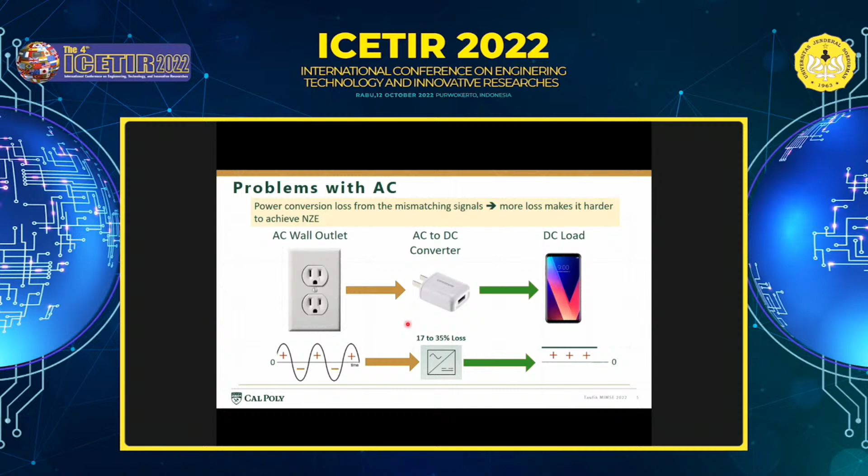And unfortunately, in the process of converting from AC to DC, you're going to have some kind of a loss. And the loss is not small. It's actually pretty significant. It's 17 to 35% loss. So that's a big loss if we are keeping up with AC to DC.

And there are other problems with AC. AC is harder to control than DC. The reason being, for example, there is only one type of power in DC. So when we're dealing with DC, there's only one single power consumption you have to deal with. That would be watts, right?

Whereas in AC, we are dealing with more than just one. We have watts, and in addition to that, we also have instantaneous power, average power, reactive power, complex power, as well as apparent power. So there's more that we need to worry about when we are using AC, right? Compared to DC, there's only one that we need to worry about versus 4 or 5.

In addition to that, AC usually requires more types of compensation, unlike DC. For example, reactive compensation, right? And this could be a problem if you have an inductive load, then you're supplying the same wattage at higher current.

That higher current translates into higher losses, right? And so on and so forth. So yeah, bottom line is that AC by itself inherently is harder to deal with than DC.

Okay, so hopefully I've convinced you enough to conclude that we somehow need to complement AC with DC, right? And there are reasons for doing this. Number one would be the increasing number of residential DC loads.

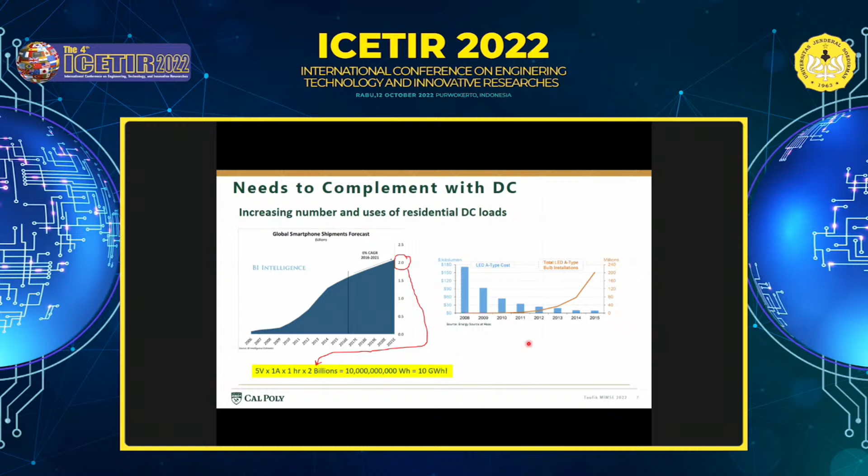And that's not a tiny number anymore, right? Again, these are all processed through DC. And then we have this upcoming technology that's become prevalent these days, called USB Type-C. Now we're all familiar with USB Type-C compared to a couple of years ago. Not many people knew about it, but now it's becoming common.

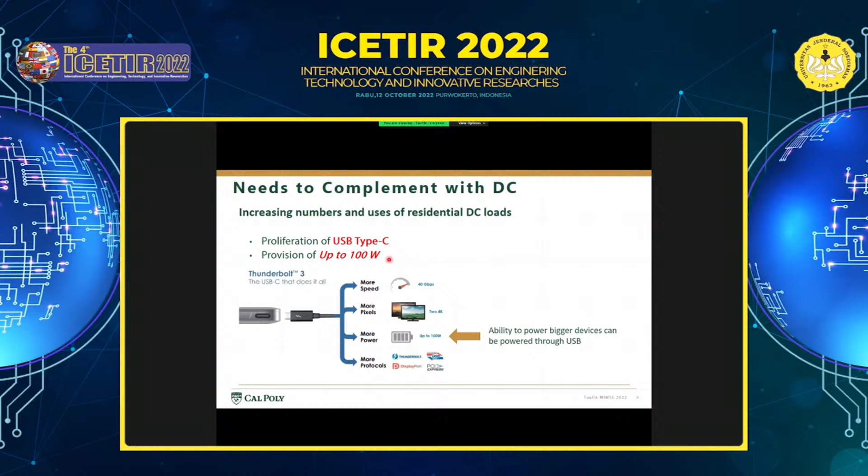What's great about USB Type-C is that the targeted wattage that can be delivered with this connector is 100 watts. That's great news, because 100 watts could power many things, including your laptop and your TV, if they're running off DC, as well as many other device chargers. So you can see from just looking at these numbers that the future of DC is something we need to watch out for.

And then another thing would be—I've done this. Okay, somebody's turning on their microphone. So I've done these studies on residential electricities.

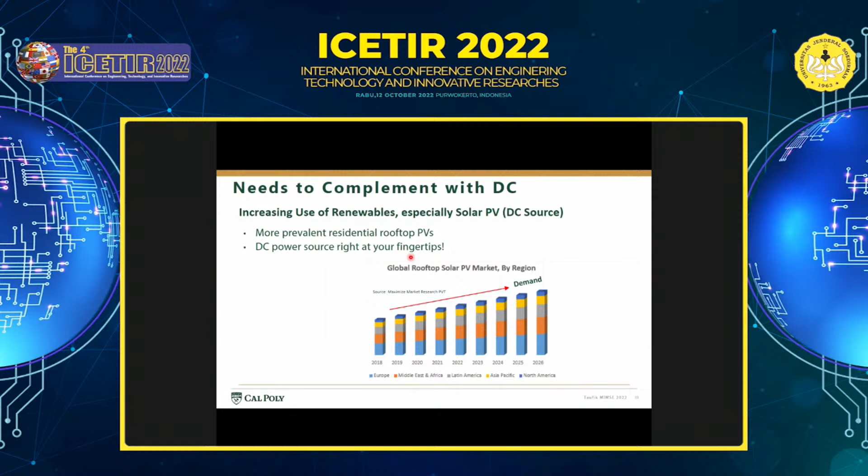And then we have this increasing use of solar panels, rooftop solar panels, and this is actually an energy source that provides DC. So now you have a DC power source right at your fingertip. And that's something that again would hopefully indicate the increasing importance of DC.

These days we have solar panels, and from the solar panel, which is DC, we convert it to AC, and then we convert it again to DC. Then we use DC to DC to finally power our DC loads. Rather than having three different stages, we can bypass and just use one single stage conversion, which would make it more efficient. And if it's more efficient, there will be less loss, making it easier for us to achieve this net zero energy house in the future.

I talked about smart devices, and all of these devices, as you experience as well, including in Indonesia, more and more people are putting cameras, alarm systems, smart garage openers, things like that. And these are all running in DC. So there's a big market there that would be relying on DC.

And not to forget, we also have energy storage. More and more people, especially in the US, have been putting energy storage in their house, improving reliability. If the power is out, or if there's more power produced by the solar panel, the energy can be stored in the batteries. And as you know, energy storage or batteries will be running or operating in DC.

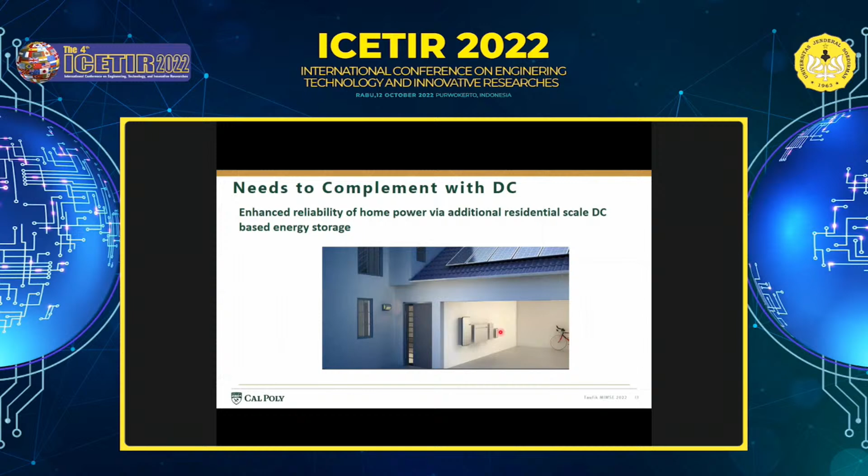So what will be the solution? Initially, as I said earlier, I've done some presentation for University of Jenderal Sudirman a long time ago on DC. But now this project evolves into AC/DC. The reason being the DC house by itself is perfect for off the grid, whereas AC/DC will be more suitable for urban areas, for cities, for houses in big cities.

Basically urban house. Now, hybrid AC/DC house operates on crisscrossing AC and DC electrical systems. It has a dedicated AC line for AC loads, dedicated DC line for DC loads, and is able to support either load type when their corresponding source is down. And the battery is going to be optional, and additional sources can also be connected.

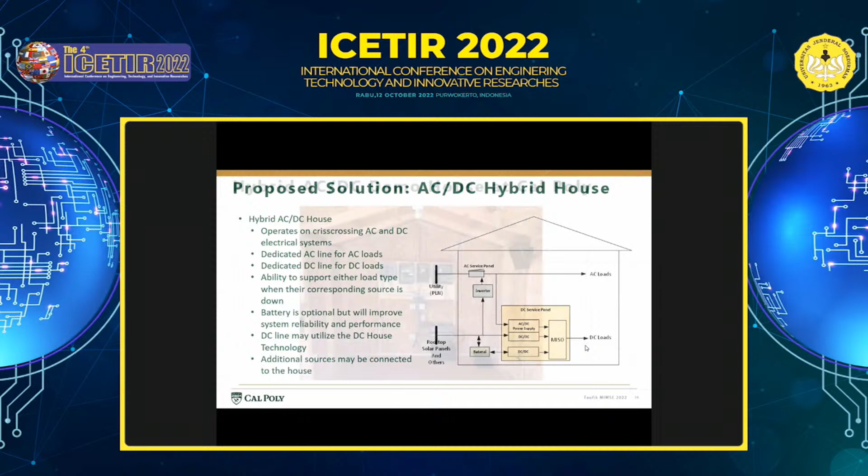Challenges on the hybrid AC/DC house. There's always challenges, right? Anytime we are exploring some new direction of some technology, there's always challenges. But challenges, as you know, present opportunities and beyond, including innovations. So this is actually a golden opportunity for us to be able to be the leader on this technology. We want to move fast, so we want to be able to explore more and lead more.

The challenges that we have, there are many. I won't go through this in detail, but we have limited DC sources, for example. So far we're using solar panels, but I'm sure it's not the only way, it's not the only type. And then how can you make those renewable energy sources adoptable? That's a question that's really tricky to answer. And then the MISO converter needs further improvement. The DC bus and loads are not standardized, and this is more difficult to protect from faults. There's some strict regulations due to ability to backfeed power, as well as the EMS system that would be great to develop.

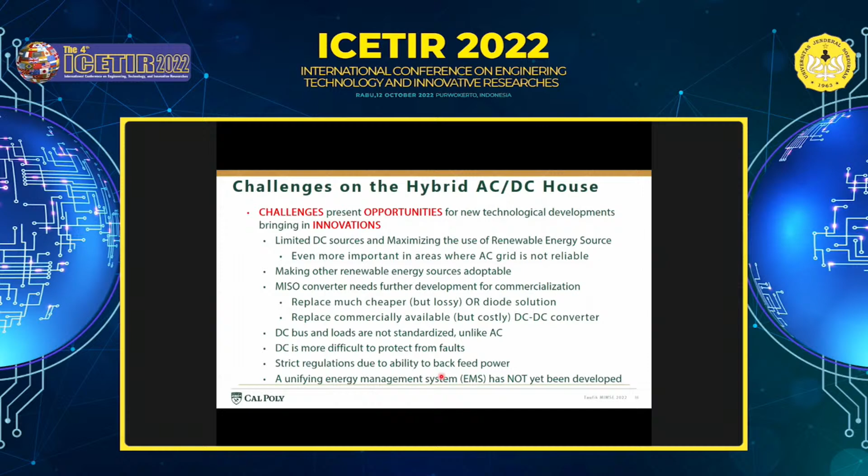So I'll go a little bit more into detail on each. Here's the first one, adaptability. Here in the US, we have this term or jargon called NIMBY. NIMBY stands for not in my backyard. Imagine if you have a house here, let's say this is our future house. I don't know about you, but I don't want to have a big, huge, humongous wind turbine behind our house.

That would be ugly as well as noisy, right? So that would be a challenge of hybrid AC/DC house: how can you make these renewable energy sources more pleasing to see as well as more adaptable to our house? So I give you two examples.

These are already existing technologies. I don't know if they're commercially available yet, but this is just an example where some of you who are interested in doing this could find a direction to improve the existing technologies.

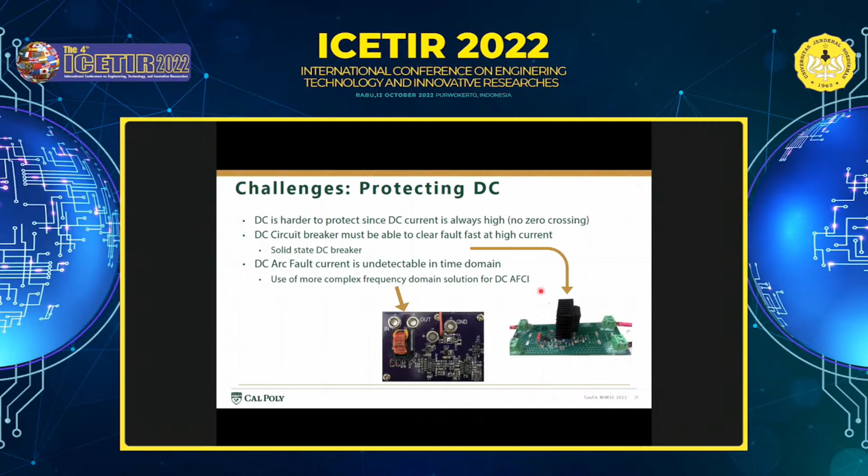Other opportunities involve developing more DC loads. That's actually becoming a hot trend in the US, where people are now designing more and more DC loads, such as DC water pumps, DC water filtration systems, freezers, air conditioning, and so on. So there's a lot of DC loads that can go into a house.

So if you are interested in doing something like this with me, let me know, I'll be more than happy to help in any way I can. It's a big undertaking, and that's why I'm really appreciative of the opportunity to share, because this is not a one-person project. It takes a village to actually support this project. So the more people get involved, the merrier, and the more collaboration between different universities, including myself, the better.

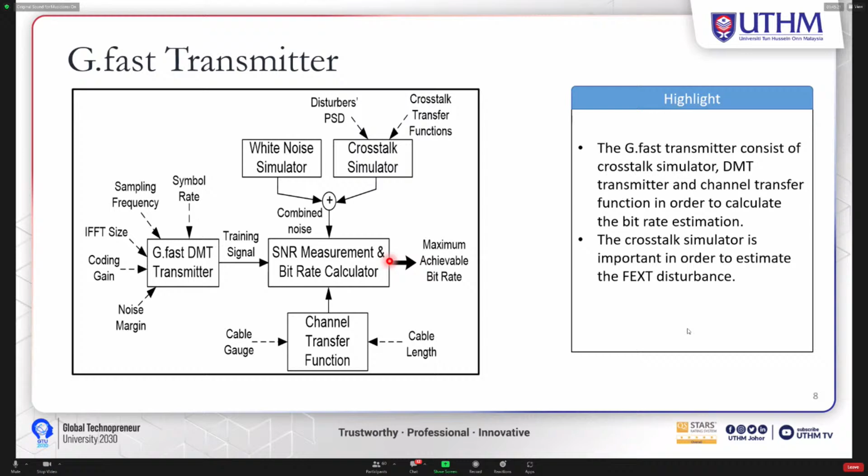The figure shows the block diagram of the G.fast bitrate transmitter, which consists of a crosstalk simulator, discrete multi-tone transmitter, and also channel transfer function as the input to the bitrate estimator. The crosstalk simulator is very important in order to estimate the far end crosstalk disturbance in the subscriber line.

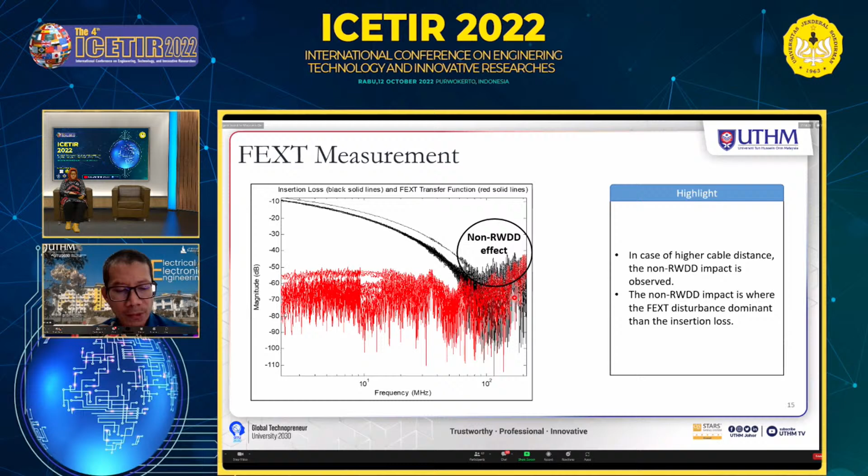These are another example of non-row-wise diagonal dominance plots, as you can see. This is for a 100-meter cable. As you can see, the top element of the matrix has a higher magnitude compared to the other elements of the matrix.

So in telecom, we use pre-coding as a technique to mitigate or suppress the crosstalk interference at the transmitter and also at the receiver. Since signals are transmitted from the same location, pre-coding can be applied to pre-distort so that the crosstalk signals arriving at the customer premises equipment are mitigated.

In G.fast systems, pre-coding is a compulsory requirement based on the standard ITU-T G.9700, which is based on the power spectral density, and G.9701 on the physical layer.

Pre-coding has two types: linear pre-coding and non-linear pre-coding. Examples of linear precoders are the zero forcing precoder, diagonalizing precoder, and equal power precoder. There are others like maximum ratio combining or transmission, beamforming precoder, and transmit Wiener precoder. Non-linear precoder examples are the Tomlinson-Harashima precoder, the Costa precoder, and vector perturbation precoder. Linear precoder is used for the row-wise diagonal dominant case, while non-linear precoder is used for the non-row-wise diagonal dominant case, or non-RWDD case.

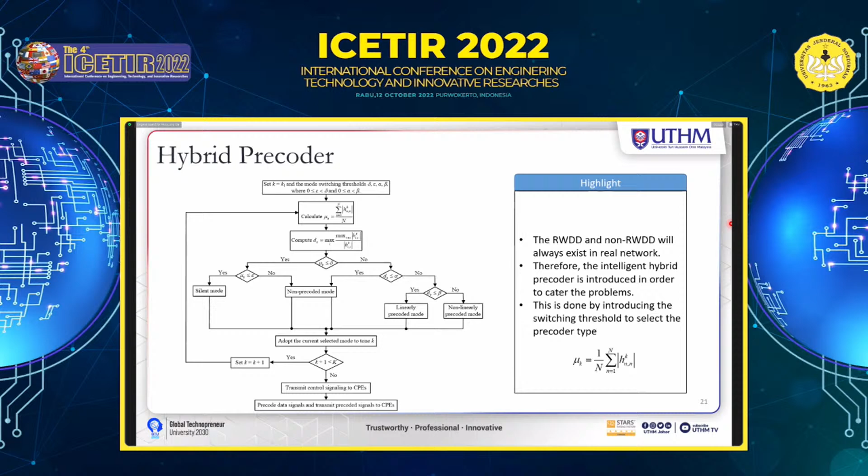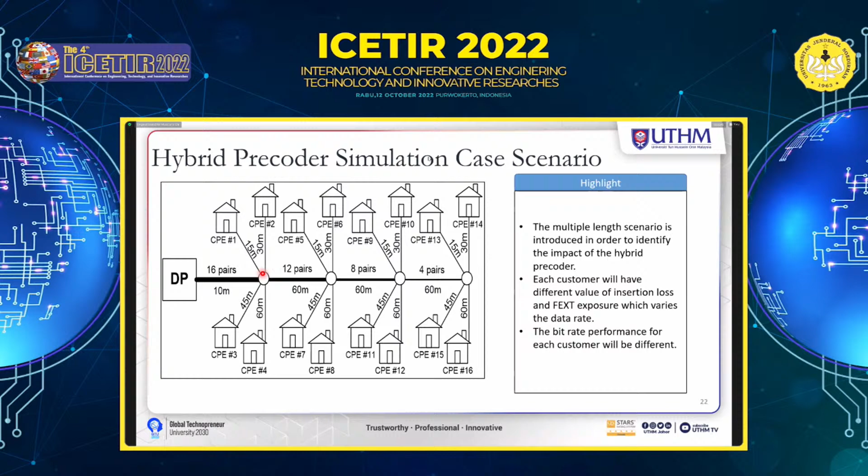In this loop configuration, the shortest distance to the customer premises equipment is 25 meters - 10 meters plus 15 meters, for example. So the shortest customer premises equipment to distribution point distance is 25 meters, and the longest distance, if you calculate carefully, is 250 meters to customer number 16. The loop lengths of all CPEs are shown in the figure, and each customer will have different values of insertion loss and far-end crosstalk.

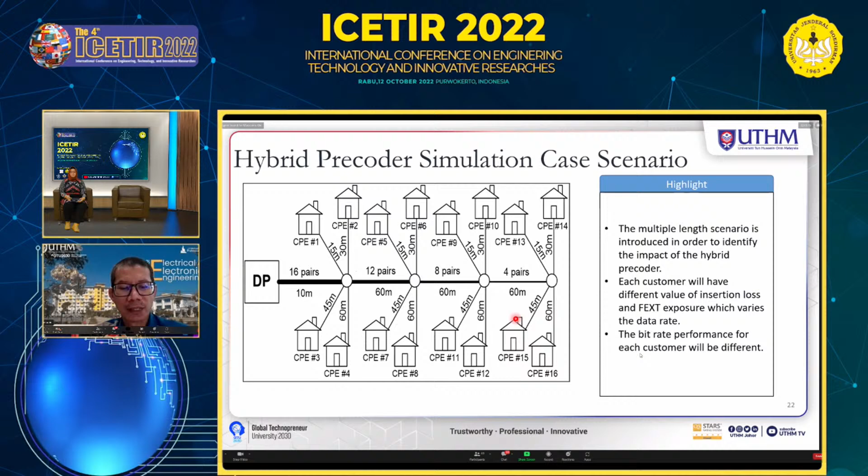In summary, far-end crosstalk noise can lead to significant degradation in achievable G-fast bit rates. So to ensure successful deployment of G-fast technology, it is essential for far-end crosstalk to be reduced or removed by using precoding, and there are several types of precoding that can be employed in the G-fast transmitter. Lastly, this work paves the way for the development of crosstalk modeling and mitigation techniques for crosstalk cancellation in future G-fast systems. That's all for my presentation.

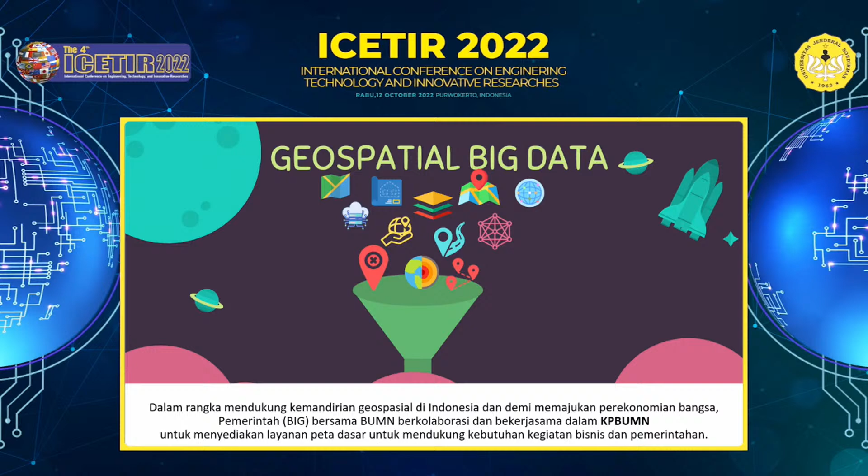So we are dealing with this large-scale image, large-scale mapping in cooperation with BUMN using what we call KPBUMN, kerjasama pemerintah badan usaha milik negara, under the Keppres 11/2021. So this is some of the regulation. I can just skip this one.

Several methods that we use for our technology for acquisition of the geospatial information data. We can divide it into 3 categories. First, in the urban area, we need more detailed data with a very high level of quality, using the airborne as well as the LiDAR, and also using aerial photographs, both metric or non-metric. And then in the rural area, it might be less detailed compared to the urban area.

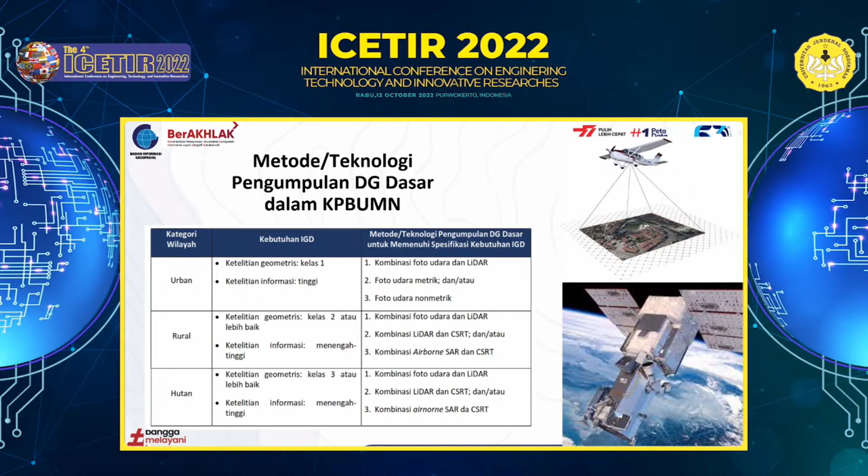We use the combination of citra satelit resolusi tinggi, or what we call the large scale satellite images, in combination with the airborne SAR. And in the forest area, for example, we can do the combination of aerial photo and LiDAR, and so on. So this is part of the technology behind the data acquisition, how we do the LiDAR and the photogrammetry, as well as how we work with the large scale remote sensing image. And this is how we do the airborne SAR processes.

This is considered a very convenient technology for the acquisition of the data, meaning that we can do the acquisition during the day as well as in the night, because it can go through the fog, bad weather conditions as well as the cloud, and so on, and we can cover a large area compared to the other technologies. So nowadays we are pushing to develop this technology, especially for our industry and also for us in the BIG.

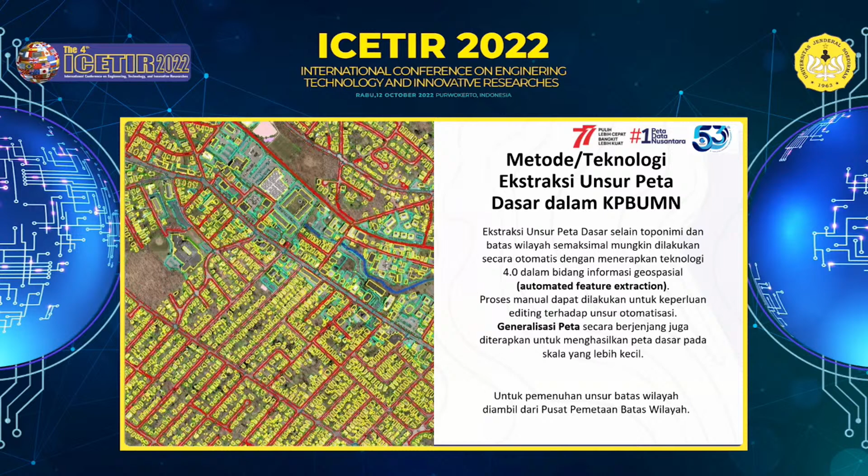Then we do the extraction and the analysis using, for example, what we call automated feature extraction, or we can also use artificial intelligence to help us with the digitizing and with identifying the objects when we get the data from space. And later on, we put the name on every polygon, what we call the toponymy processes.

Another important aspect is participatory mapping, where the community can also be involved and contribute to developing our map. For example, developing the border map at the village level, the region level, the city level, as well as the national level, and so on. So this is an example of our base map services.

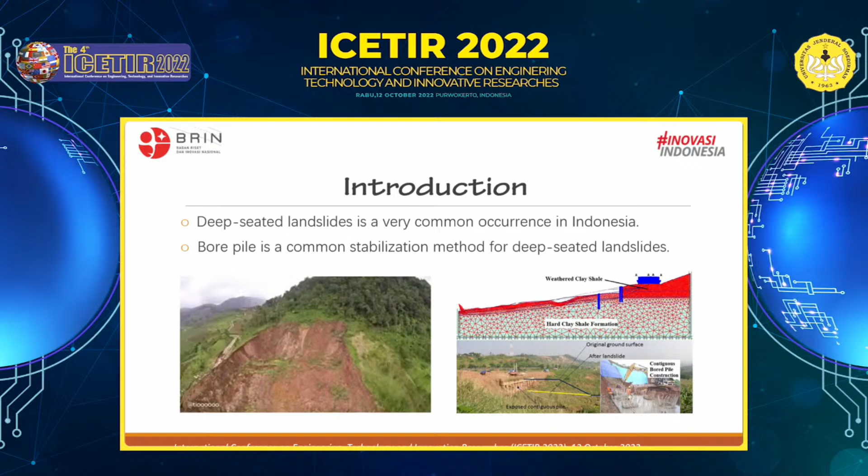the groundwater itself is still rising during rainfall, so the stability is still affected by the groundwater. As we understand, the influence of rainfall infiltration will increase the groundwater level, and hence the water pressure within the slope, and the increase of water pressure will decrease the shear strength and then the stability of the hill slope. So we can see that if we can control the groundwater level during the rainfall event, then we can maintain the stability of the hill slope.

Many studies have already indicated that when we draw down the groundwater level, we can stabilize the landslide. Some methods already used to stabilize the landslide using this groundwater drawdown include the sub-horizontal drain, relief well, and the new method, siphon drain.

This is what we call the gravity-driven groundwater extraction for slope stabilization, the siphon drain. Of these three methods, the sub-horizontal drain is effective, but it has some limitations in that it cannot reach the deeper aquifer. The relief well is also effective, but has some limitations: the construction cost is very expensive. And the siphon drain, I will show you the effectiveness of this method in the next slide.

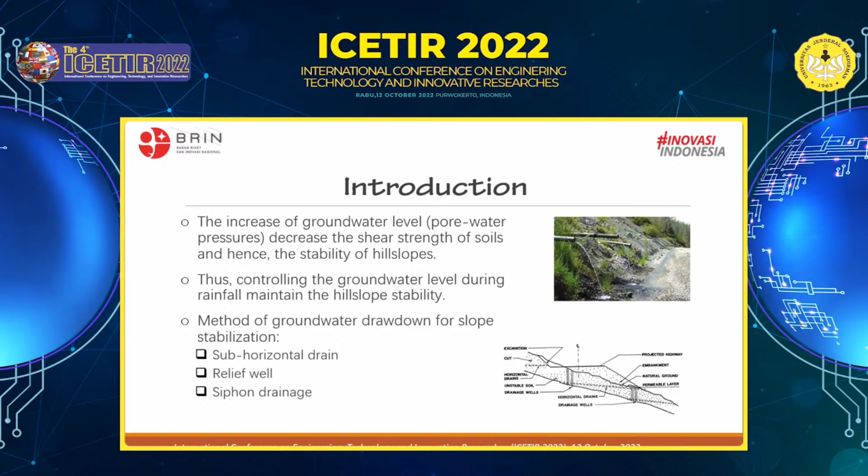The principle of the siphon drain is actually very easy to understand. You may already have done this kind of technique to extract gasoline from your bicycle or motorcycle tank into, let's say, a bucket. You put the tube into the tank, and then you try to suck the tube, and then suddenly the gasoline will flow into the bucket. This is the principle, a very easy principle of the siphon drain. As long as we have a different pressure within the system, the liquid will start to flow from high pressure to low pressure. And this principle is now applied to work for slope stabilization.

What we do with the siphon drain is how we can draw down the groundwater level continuously during the rainfall infiltration, during the rainfall event. We need to construct a vertical well, and then we insert a siphoning tube, very specially made, because it should withstand the weather. And then at the end of the siphon tube,

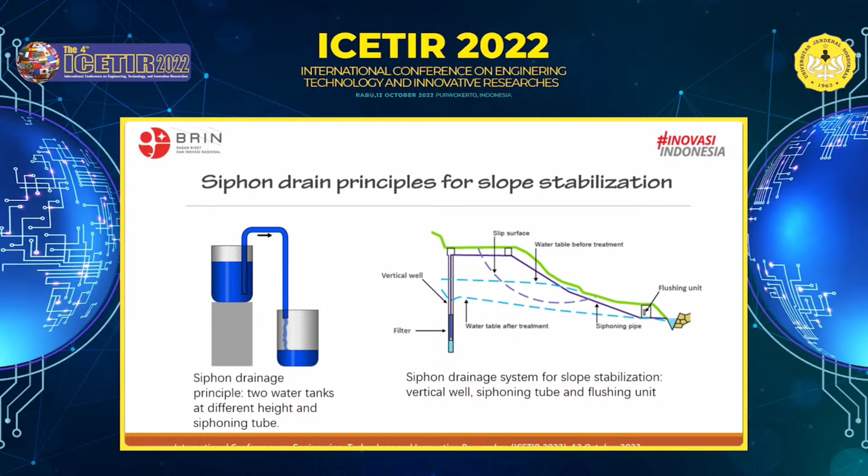The system is already applied in Europe, but we know that in Indonesia, when we consider the geological condition, there are some hill slopes that may have a bad quality of groundwater, especially in the volcanic area where sedimentation easily develops due to the influence of the weather.

So in order to evaluate the effectiveness of this siphon drain system, when we need to apply it to this geological condition, we have to understand the factors controlling the effectiveness of this siphon drain, and when we apply it to the field condition, what factors influence its performance in the field.

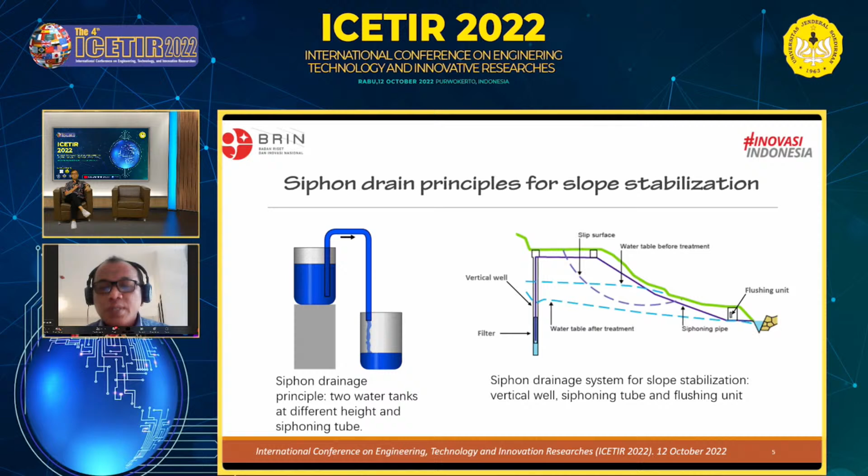So a few years ago, we conducted an experiment in the laboratory to clarify the factors controlling the effectiveness of the siphon drain method to lower a water table in a model slope.

The objective is to study the effect of the drainage well location, the initial water level, and different rates of water table rise on the performance of siphon drains. Of course, these three factors are very important to decide where we have to install, and at what distance, the vertical wells should be constructed.

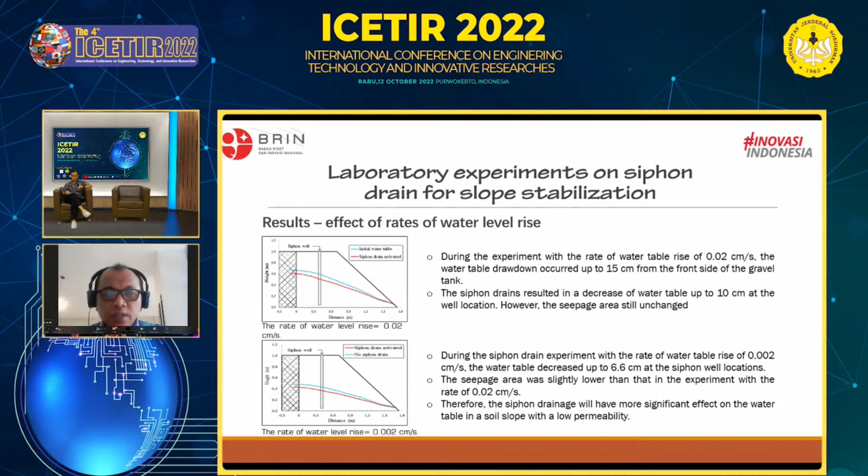During the siphon drain experiment with a rate of water table rise of 0.002 centimeter per second, the water table decreased up to 6.6 centimeters at the siphon well location. The seepage area was slightly lower than in the experiment with the rate of 0.02 centimeter per second.

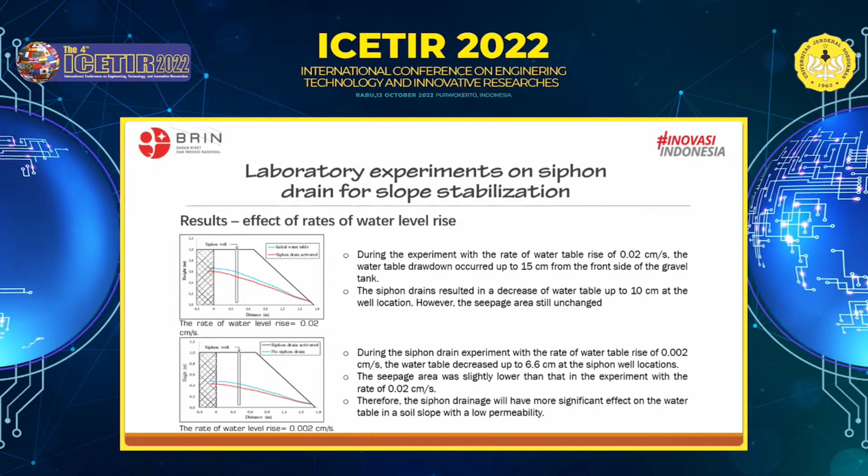So the siphon drain will have a more significant effect on the water table in a soil slope with low permeability. The conclusion of this laboratory experiment: the experimental results show that the siphon drain method's effectiveness depends on the initial water table, well location, and the rate of water level rise.

Second, the siphon drain method can significantly affect the slope when installed where there is high water pressure head. A significant drawdown of water table occurs at an initially high water table, and a significant drawdown of water table occurs at a slow rate of increase in the groundwater table, in other words, in a soil slope with low permeability.

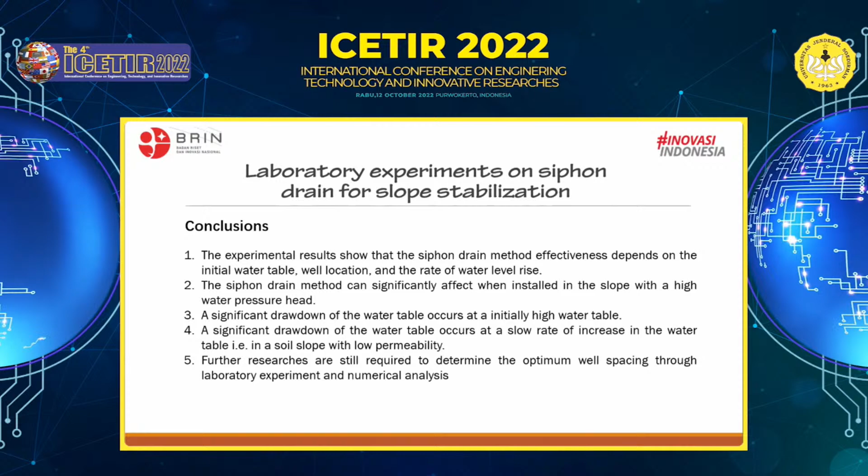Next, I will show you the field experiment of siphon drain for slope stabilization. The purpose and objective of this field experiment is to evaluate the effectiveness of the siphon drain system with vertical wells to maintain the stability of landslide masses in a volcanic hill slope in West Java.

The objective was to evaluate the long-term performance of the siphon drain method for lowering the groundwater in the landslide area, quantitatively evaluate the influence of the siphon drain system on landslide stability, and give some insight into the factors affecting the effectiveness of the siphon drain method in stabilizing landslide masses in volcanic soil.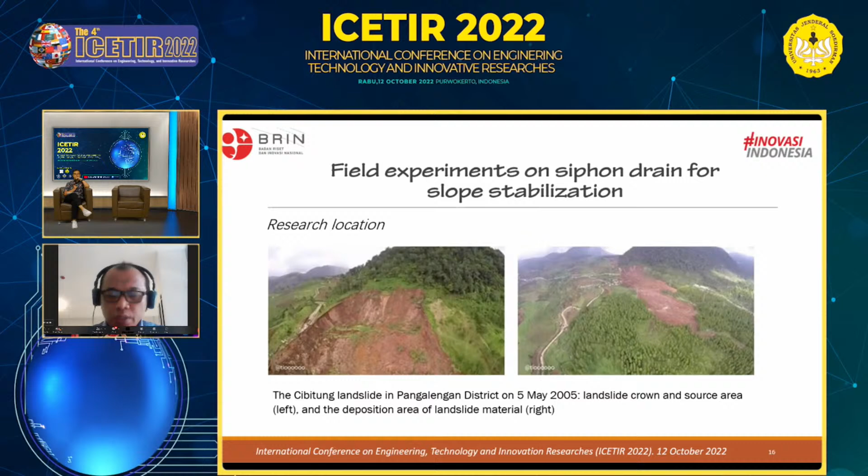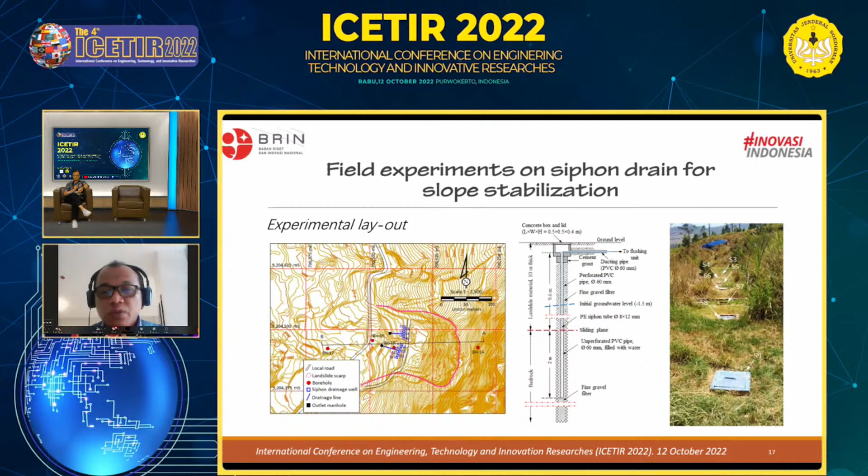This is the construction of the vertical well. We drill the well up to 12 meters, then insert the siphoning tube up to 10 meters depth from the ground level, and at the end, the siphoning tube is connected to the flushing unit.

This is the schematic cross-section of the slope in the landslide area, showing the location of the siphon well. The picture on the right is the flushing unit installed at the toe of the slope. In total, there are 10 flushing units installed there.

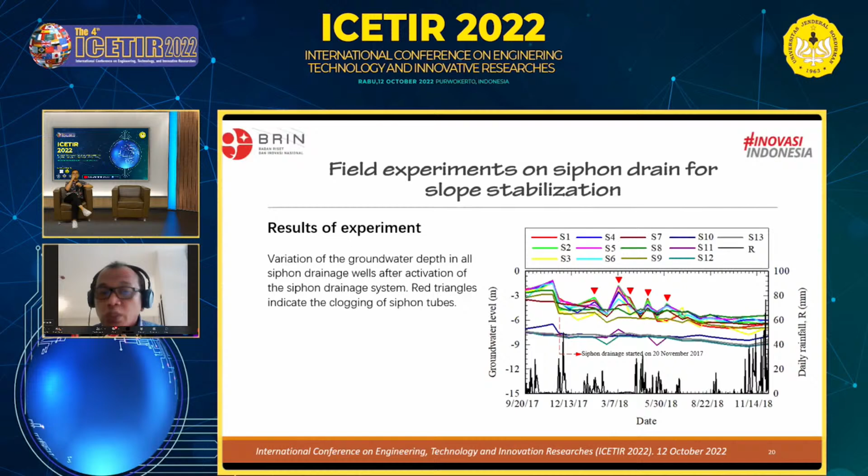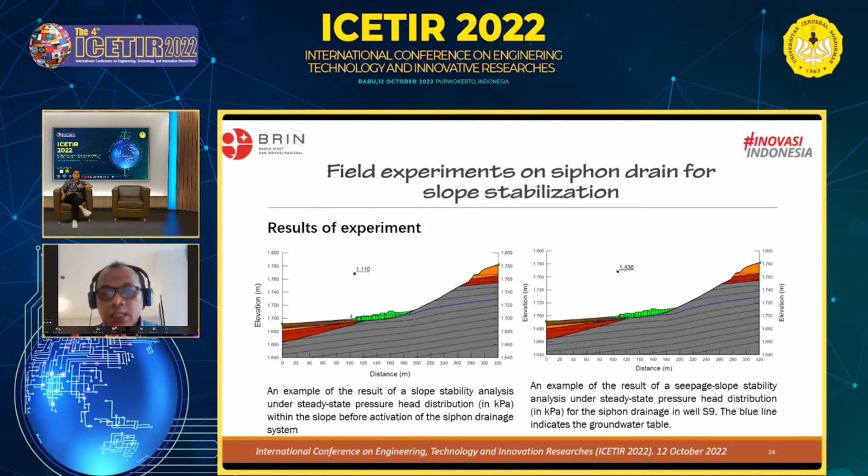So as a conclusion from the field experiment, in most landslide areas with a high groundwater level, the siphon drainage system can significantly reduce the groundwater level up to a depth of -7 meters

with a significant total discharge rate of up to 24 cubic meters per day. However, the siphon drain performance was affected by groundwater quality. So regular maintenance of the siphon tubing is necessary to maintain the long-term performance of the siphon drainage system in landslide areas with low groundwater quality.

Based on the series of numerical modeling, the implemented siphon drainage system effectively increased the stability of the landslide area. The safety factor increased from 1.1 to 1.4.

And monitoring the effect of the siphon drain system on the groundwater table in the observation well suggests that the siphon drainage performance is affected by the geological complexity of the study area.

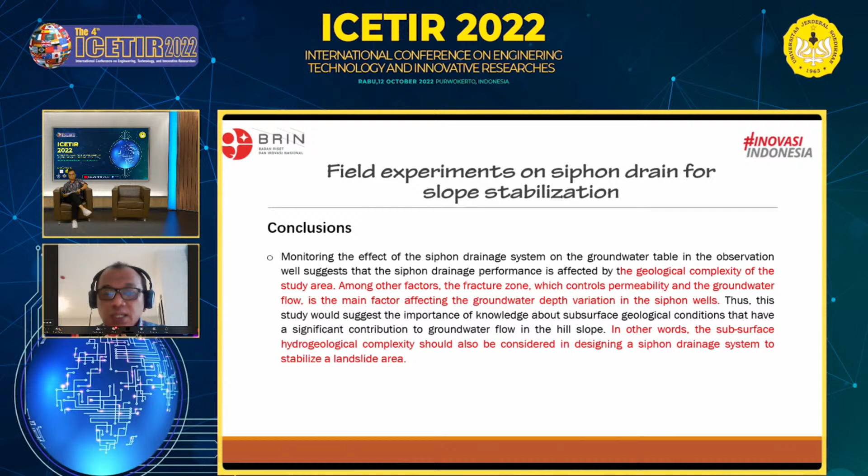Among other factors, the fracture zone, which controls permeability and groundwater flow, is the main factor affecting groundwater depth variation in the siphon well. So the subsurface hydrogeological complexity should be considered when designing a siphon drainage system to stabilize landslides.

Well, I come to the end of my presentation. Thank you very much for your attention.

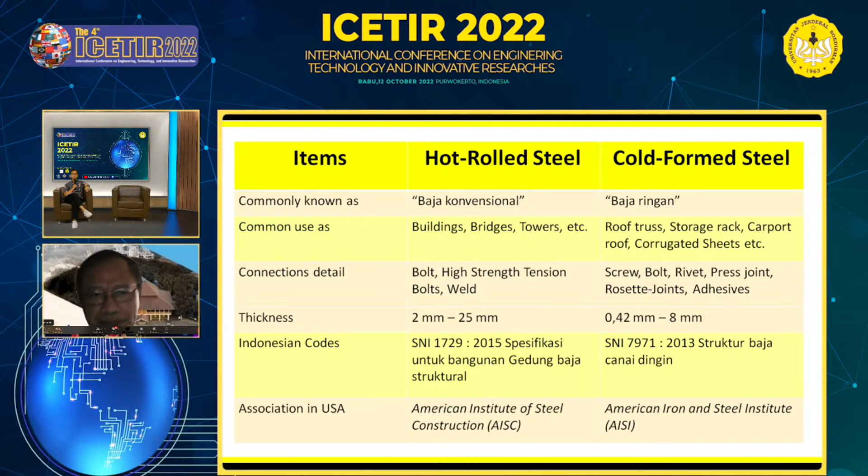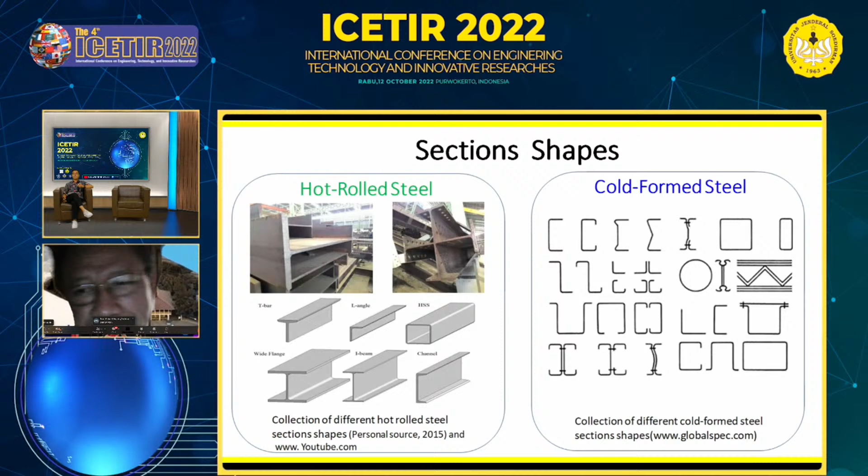And the application of hot rolled steel in the world has been coming for already 300 years, after the iron age. So I will not explain about this structure, as you have seen many of them already in Indonesia and other parts of the world.

And the application of cold form in Indonesia is focused mainly on the roof truss. Some engineers have tried to establish, for example, a short span truss bridge. And in Japan, for example, they already use many kinds of cold form steel applications, for example, for house framing.

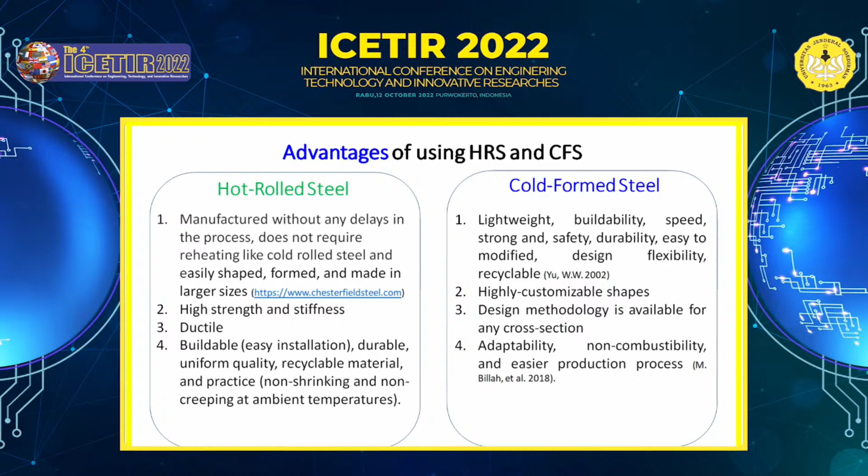On the other hand, for cold form steel, it is lightweight. This is easy to construct, and we can choose appropriate shapes that we want to use, and the design methodology is available for any cross section. So these are the advantages of both kinds of steels.

So the similarity in disadvantages is: first, about the residual stress. The two kinds of steels have residual stress after manufacturing. And the two kinds of steels are low in resistance to fire and also corrosion. So this is the same disadvantage between the two kinds of steel.

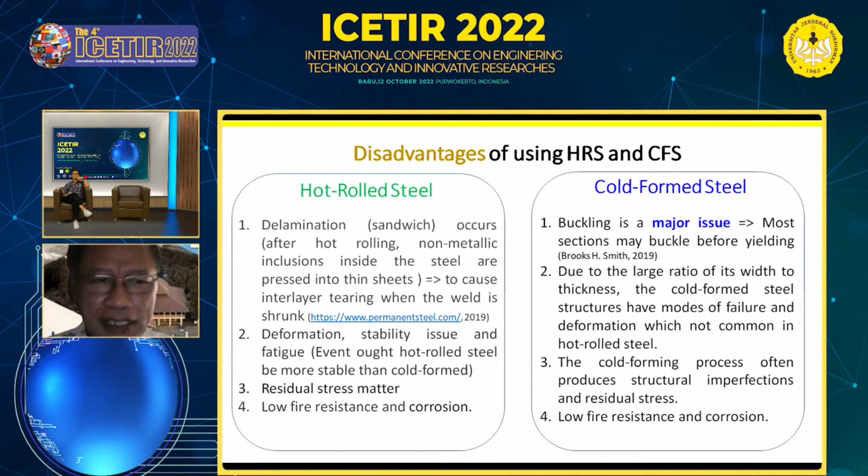So we come to the topic of manufacturing process. The hot rolling process should be done with pressure, and it is also done for cold rolling.

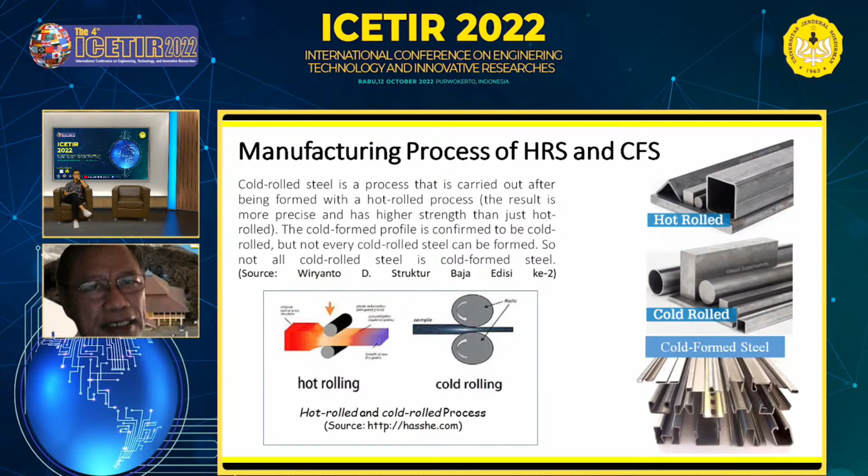The main differences between hot and cold rolling: cold form steel allows partial buckling of the section, so that the bearing capacity of the bar after buckling can be fully utilized, while hot roll steel does not allow local buckling of the section. The causes of residual stresses in hot roll and cold roll steels are different, so the distribution on the cross section is also different. The residual stress distribution on the section of the cold form, which is thin, is a curve type, but for the hot roll it is a film type.

So this shows again the process of manufacturing hot roll steels. The hot roll steel members are manufactured by roll press at very high temperatures, over 1,700 Fahrenheit.

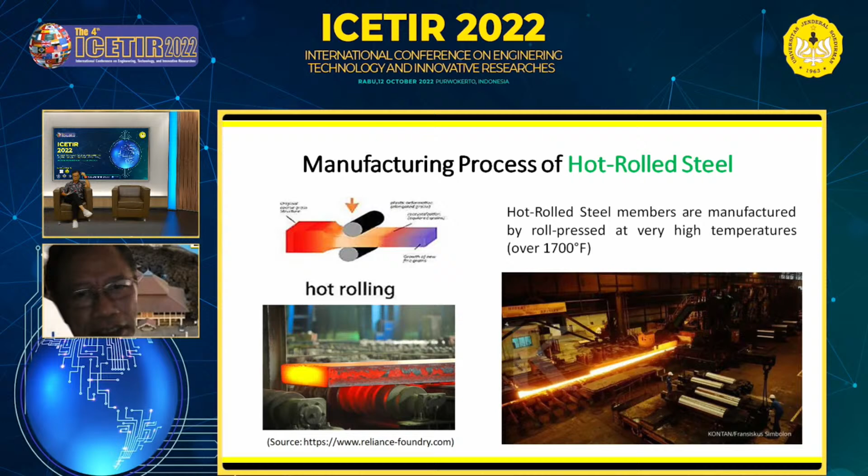And for the manufacturing process of cold form steels, we have three kinds of process. The first is what we call brake pressing. The second process is by roll forming. And the third process is by folding the plate of cold form steel.

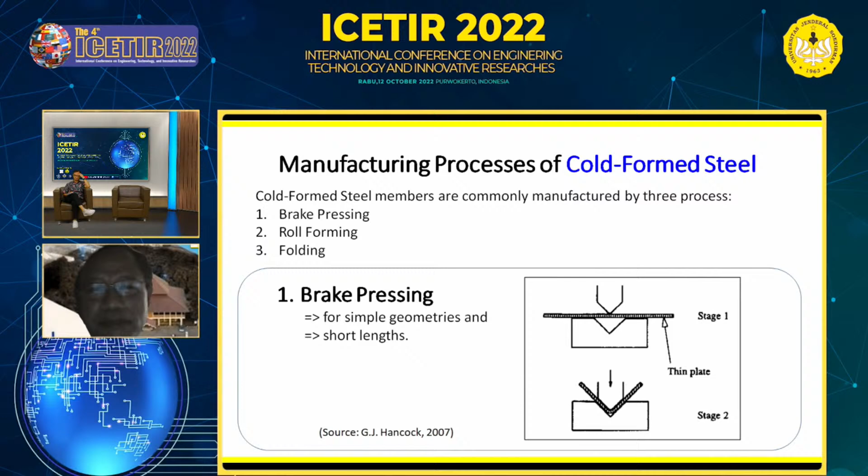So we can see that brake pressing is done for simple geometry and for short lengths of the profile. And roll forming is done for complex sections and long members. Commonly these members are used for roof trusses, floors, house framing, and corrugated sheets.

So the machines used for this roll forming are controlled with punching, cutting, dimpling, and printing capabilities, at general speeds of 20 to 40 meters per minute.

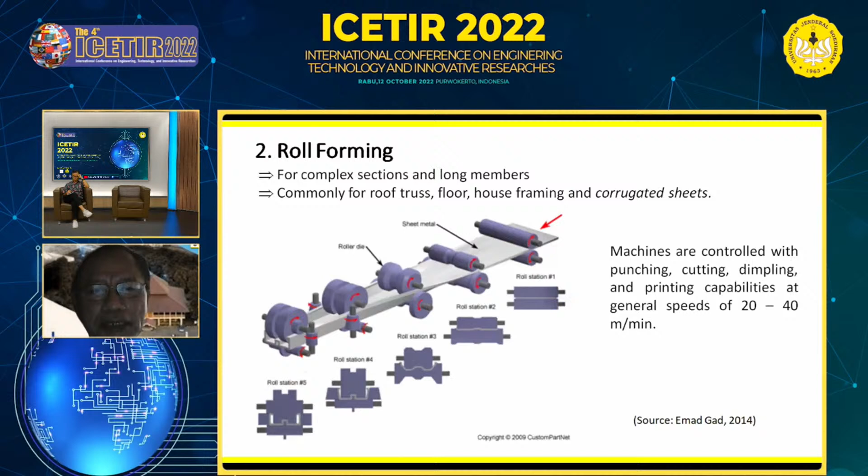And the third process is to fold the plate of the cold form steels. Each step has an effect to form one part of the profile. So for example, if we want to have a channel profile, it is done in a minimum of 4 steps, as you can see on the slide.

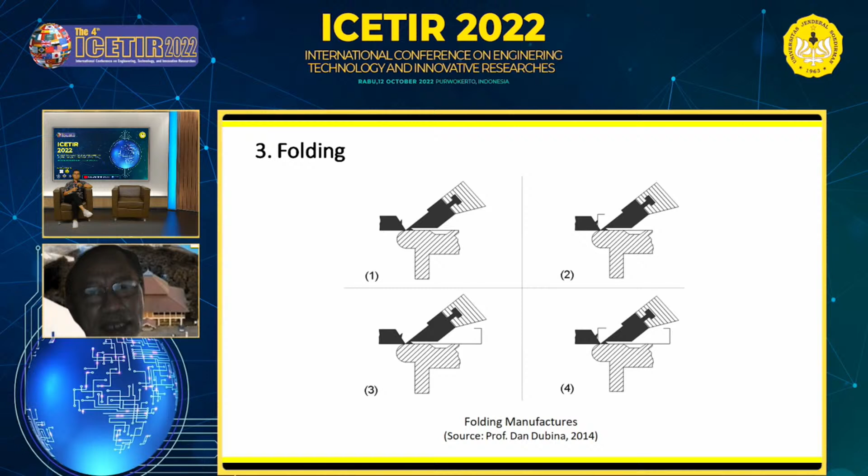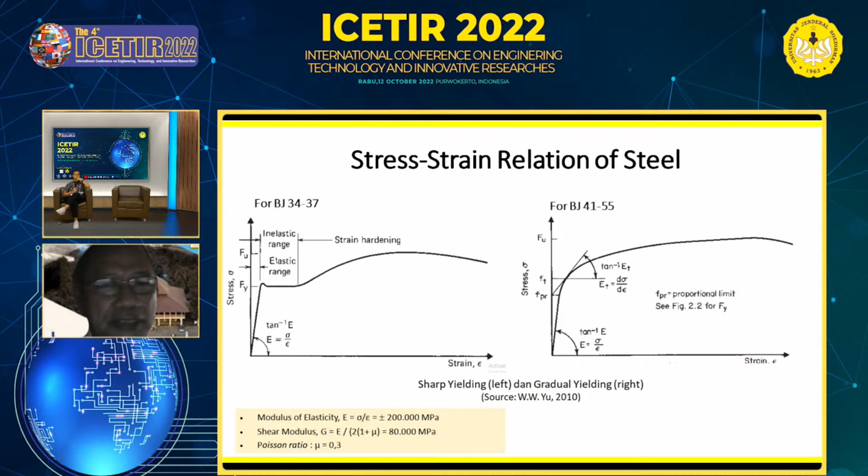And this is how the cold form behaves. So if we put a tensile load, or do a tensile test, in normal condition we have a stress strain curve like the moderate strength hot roll steels. There is a linear portion, then we have a plastic plateau, and then we have strain hardening.

And to have an increase in ultimate strength, we have to do several steps. Normally there is unloading in the strain hardening range, which can be seen on line B. And if we immediately reload this force, we come to a curve that is like the virgin ductility - so we have a curve A, B, C, like the previous original tension test for the cold form steel.

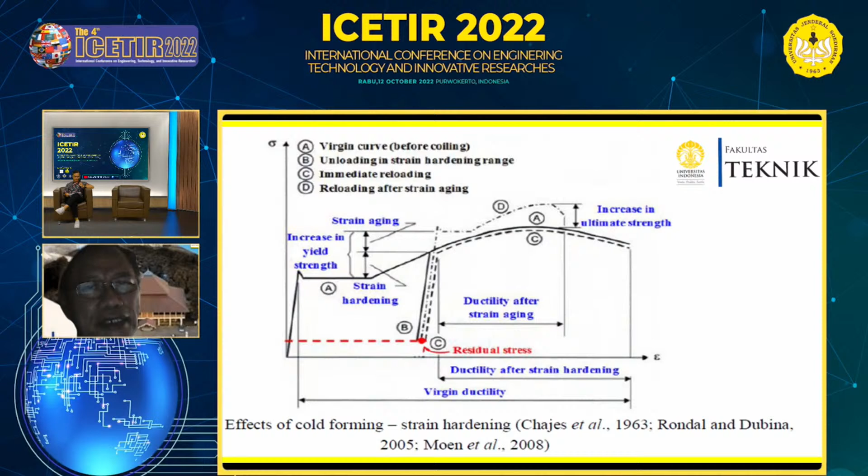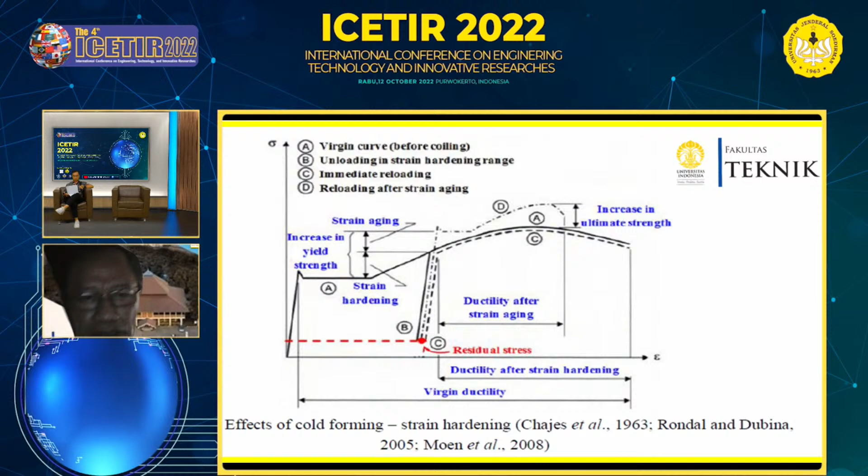But if we reload after what is called strain aging, we will have an increase in ultimate strength. It can be seen that after unloading, we wait for some time, and depending on the temperature, we don't do it immediately. Then we will have strain aging, and the curve will take the D line - so we have an increase in ultimate strength, but this technique creates residual stress. So if we ignore or erase the residual stress part, we come to this stress-strain relationship.

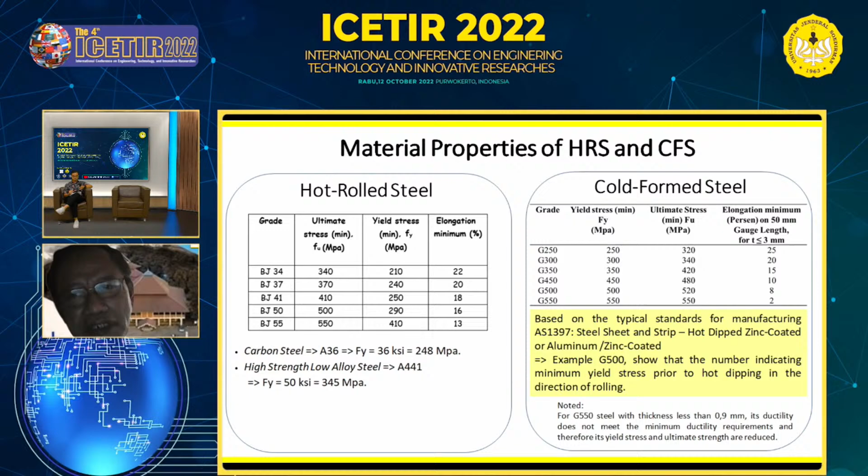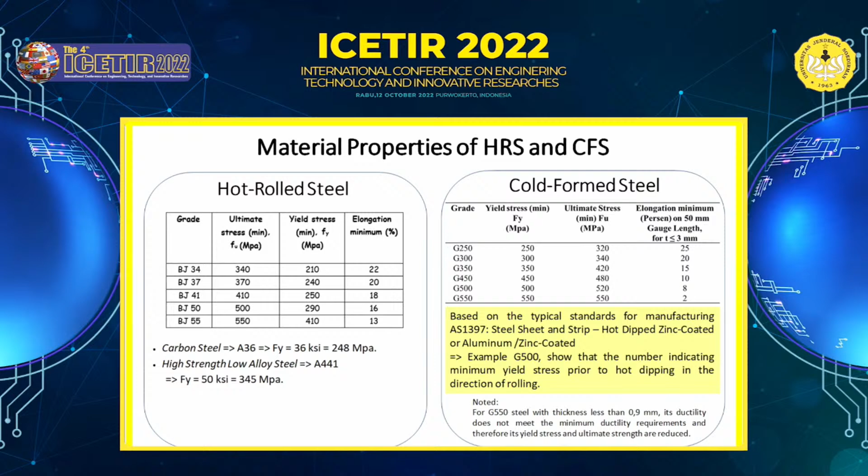Here is the hot roll steel and cold form steel ultimate stress and yield stress, which depends on the grade of the steel. For cold form steel, for G550, the yield stress and the ultimate stress are at the same level. On the contrary, with hot roll steel, we have good elongation, but for G550, for the cold form steels, we have an elongation of only 2%, so it is small.

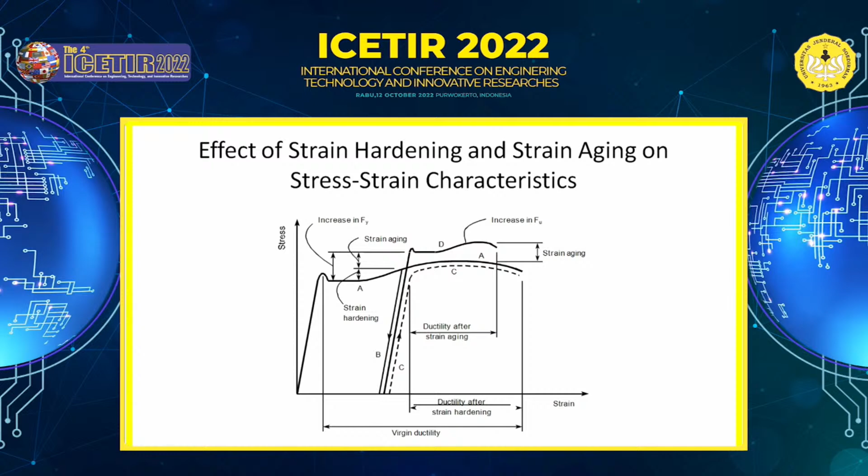For two kinds of thickness, we have tested 0.65 and 0.75 millimeters.

About the design standard, for hot roll steel we can refer to SNI 1729 2015, and for cold form steel we can refer to SNI 7971 2013. We can also refer to the AISC steel construction manual for hot rolled steel, and the Indonesian SNI for cold form steel is based on the Australian and New Zealand standard.

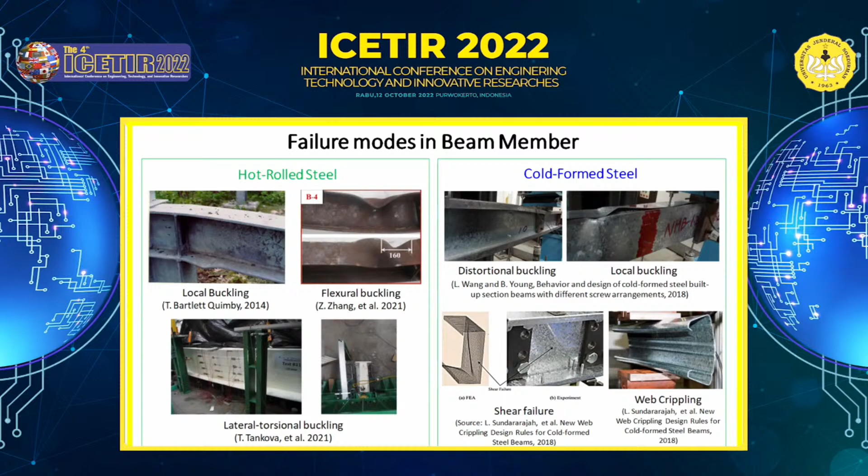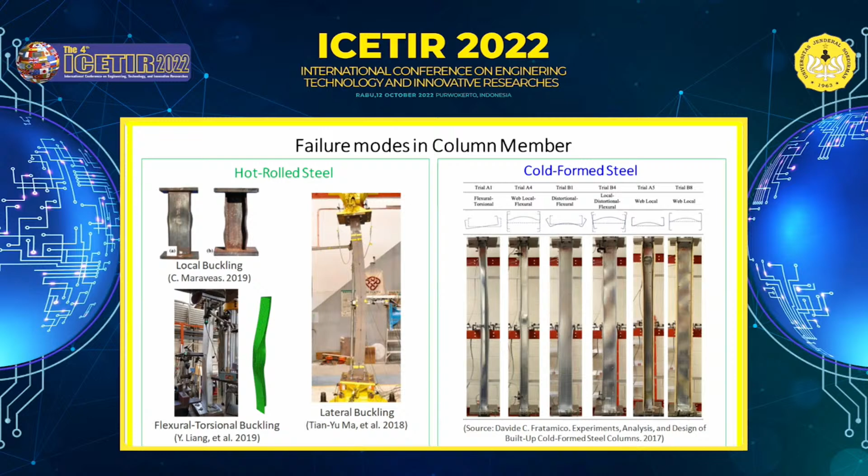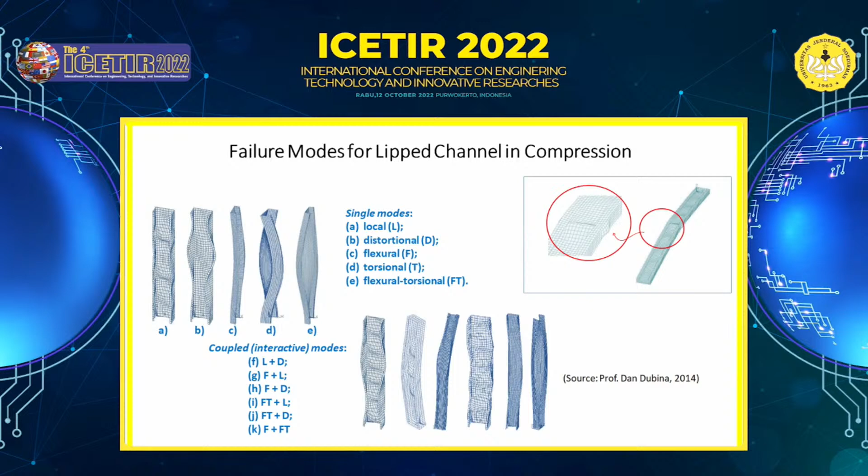If we focus on the imperfections in thin wall cold form steel members, we can have three kinds of imperfection. The first is mechanical imperfection, because the shape of the cold form member is not symmetric. For example, for channel profiles, we can have loading eccentricity, eccentricity at the support, and imperfection at the material side caused by the forming process.

We can have higher ultimate stress, but on the other side we will also have residual stress. And there is imperfection in the geometrical situation for the member - we can have local imperfection, or we can have global member imperfection.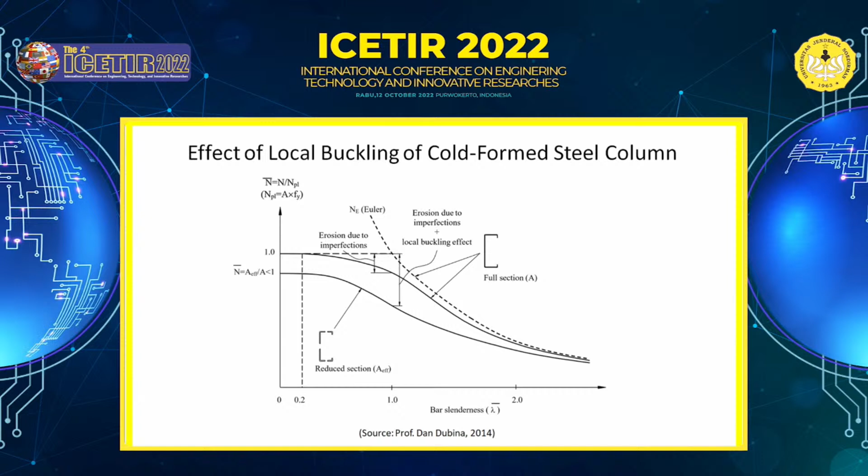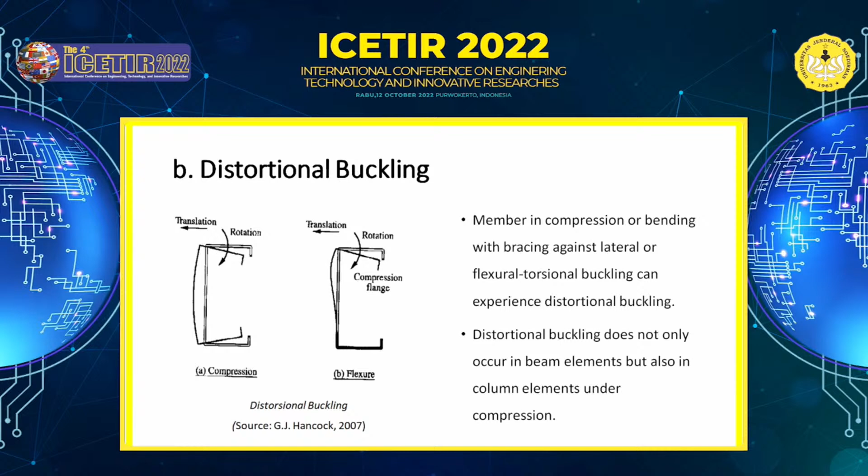So this is how the distortional buckling happens. And here again, you can see how the web crippling happened.

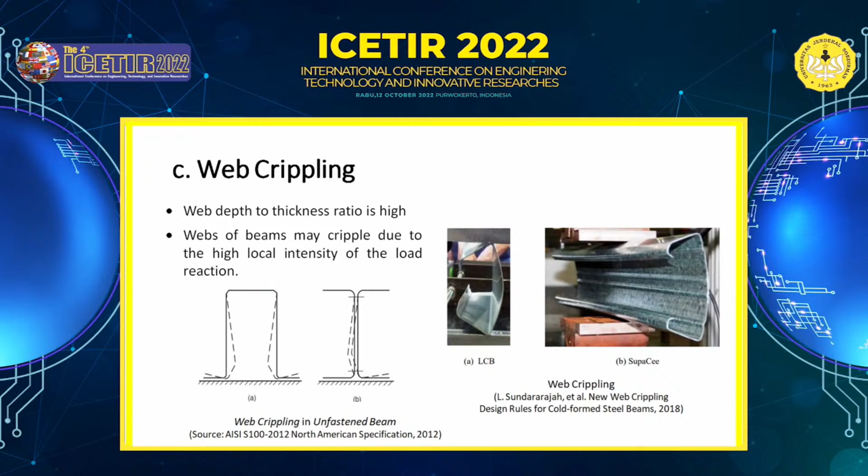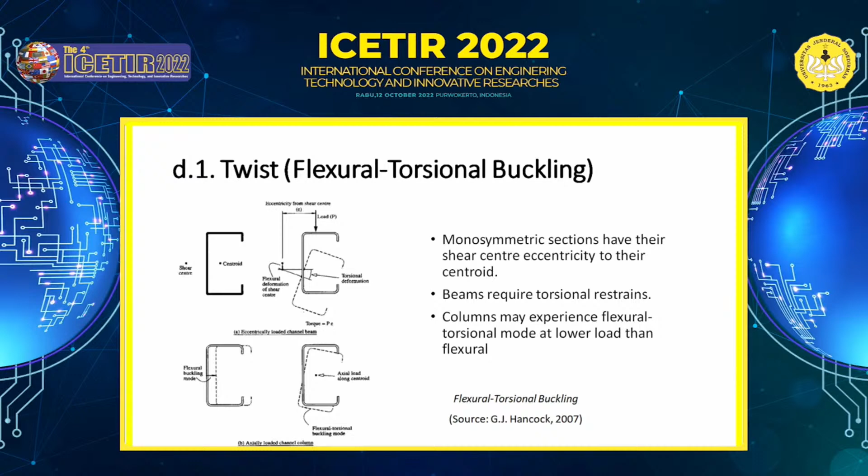And we can have also the flexural torsional buckling. So this is a combination between flexural buckling added by torsional buckling. Because, as you see here, the centroid and the shear center are not at the same location, and if the force or the load has some distance to this shear center, then we will have a torsion moment. So we will have flexural condition in addition to the torsion moment.

So this is about the twist, torsional buckling. As the load does not pass the shear center, this member will twist.

And then we come to the connection for hot rolled steel and cold formed steels. So for the hot rolled steels in Indonesia, we have already the bolt, the common bolt, or the high strength bolts. Welds have already been done for many years in Indonesia. But for the cold formed steel in Indonesia, it is done with screws. So it is rare to use bolt, rivet, press joint, or adhesive for joining members.

So in cold formed steel sections, we have failure modes that are different from the hot rolled steels. The bearing mode also exists in hot rolled steel, but not the tearing and the tilting. So these are the differences in failure mode of the connection.

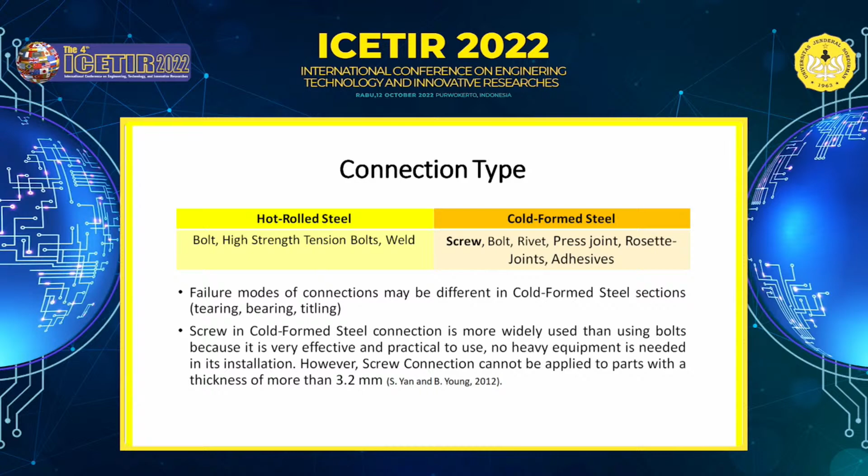So why is the screw connection used for cold formed steel? Because it is very easy to use and it's very practical. No heavy equipment is needed for the installation. And this screw connection has a limit: for more than 3.2 millimeters, it cannot be applied. Okay, so I will skip this part.

Now, if we look at bolt connection design, we have to check the strength in shear and the strength in bearing. But for the screw connection, we have to check also the tilting, besides the bearing capacity of the screw connection. We have to check the tilting strength. So you can refer to Hancock's studies in 2007, and he provides several formulas for calculating the screw.

So we cannot use the bolt connection formula for screw connection. It is very different.

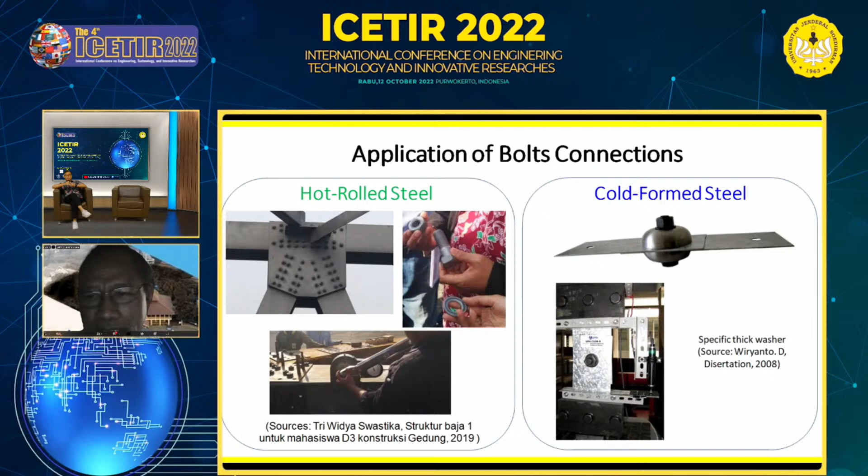So here is the application of the bolt for the hot rolled steels, and we can also use bolts for cold formed sections. But as you see, the washer should be thick for the bolt connection on the cold formed steel to be used. I take this picture from Prof. Wiryanto Dewobroto's dissertation.

So the failure modes of the bolt connection in shear: we have several modes, tearing, bearing, and tensile failure along the width of the profile, and there is also failure of the bolt.

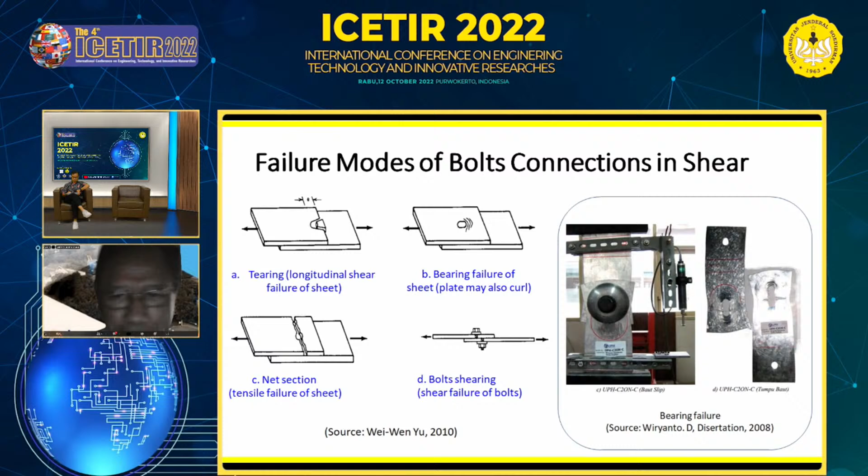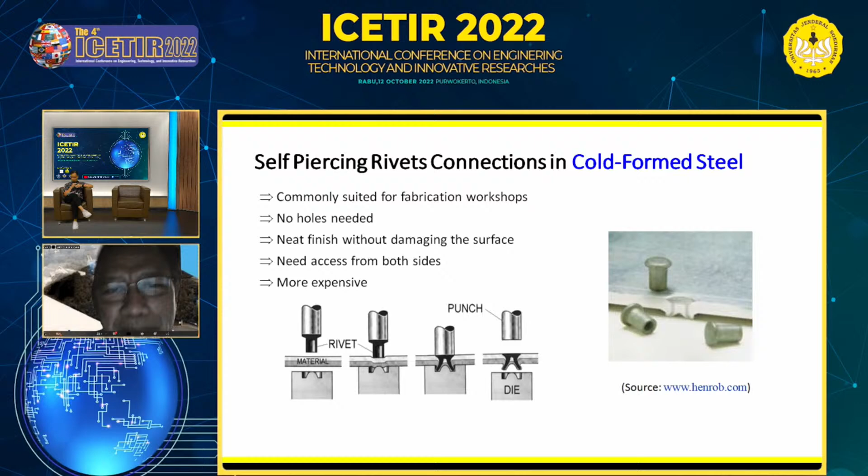And there is also the rivet, or in Bahasa Indonesia we call it paku keling. But in Indonesia we don't use this kind of pop rivet. And there is also the self-piercing rivet connection. It's rarely used in Indonesia. In Indonesia, people use screws, this kind of screw.

I'm sorry, Prof. Yeah? There are 2 minutes left for your presentation. How many minutes, please? 2 minutes left. Thank you. Yeah. So I will go on.

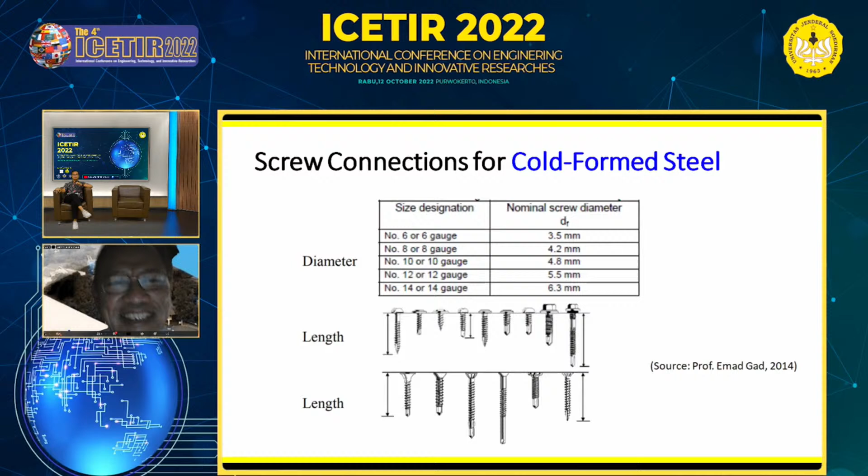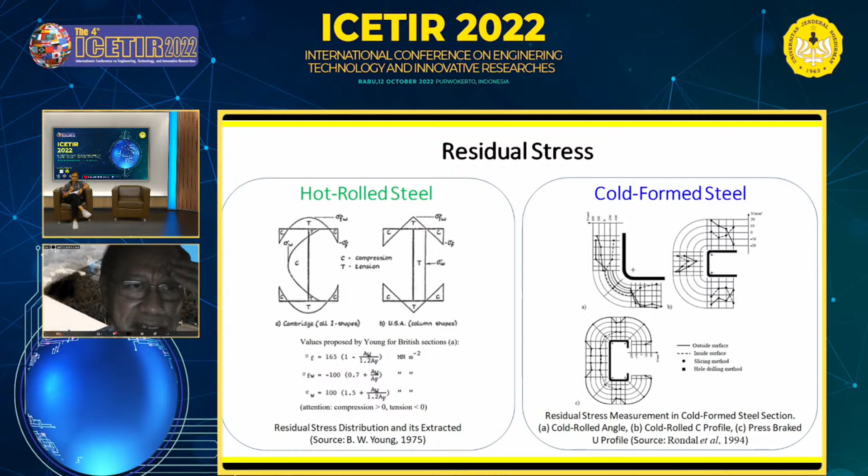This is the screw connection for the cold formed steels. And here is the residual stress pattern of the hot rolled steel and the cold formed steel. So this is how we can measure the residual stress. There are many methods to find the residual stress. So this is how the residual stress exists in the hot rolled steel and the cold formed steels.

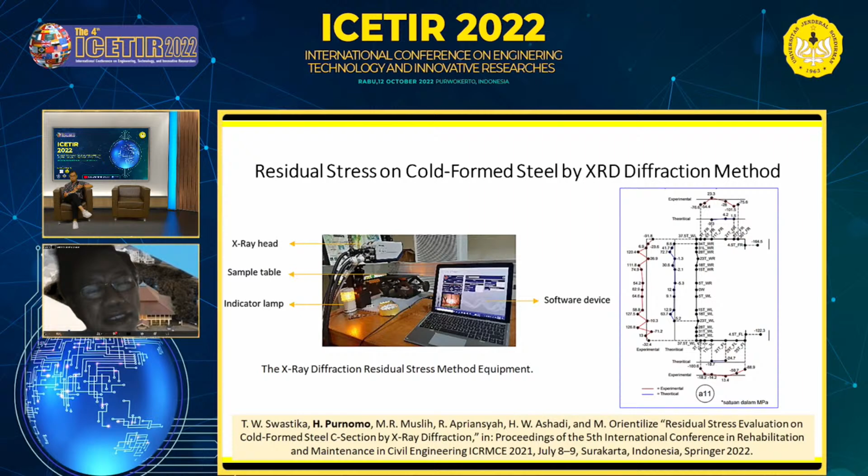So with my doctoral students, we have also measured the residual stress using the X-ray diffraction method at Serpong. So this is the result of the residual stress on the cold formed steel. It looks like the same result found by other researchers, but what we have is we measured with thicknesses of 0.65 and 0.75.

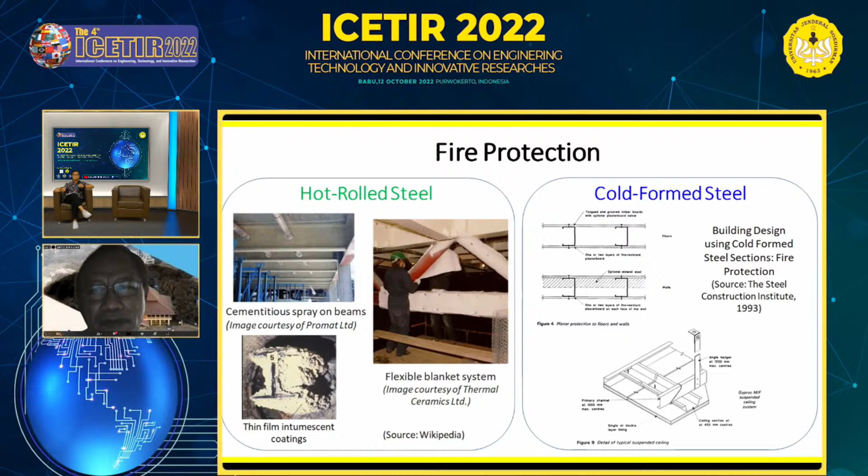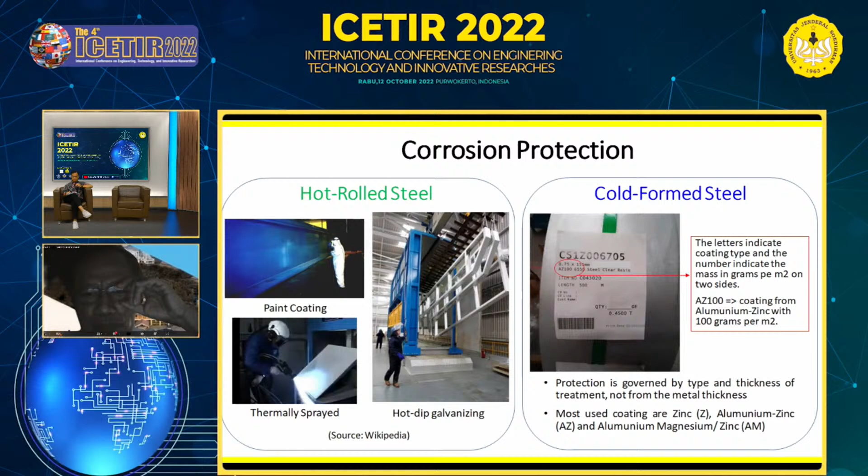So it's about fire protection. For the cold form steel, we can use plasterboard, and for protection we can use coating zinc, aluminum zinc, or aluminum magnesium zinc. So thank you for your kind attention.